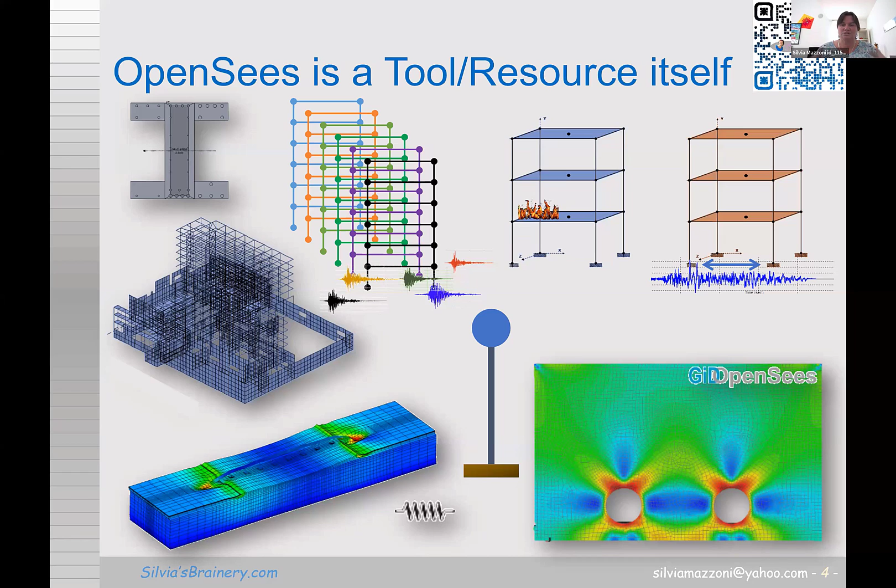And so we got to keep in mind that the hardest thing is coming up with the model. Then putting the language together is secondary. So I think we want to spend a bit more time as well thinking about, once we have this common language of OpenSees, how we want to build different types of models. So I wanted to put that in perspective, that once we get the language down, there's just so much to talk about as well.

I've tried to put these resources into boxes. And so this is just a high level one, and then I'm going to go into the details of them and just give you my perspective on each one of these. The first place you start is, of course, opensees.berkeley.edu. This is the website where you download the program itself. It gives you access to the source code.

It gives you access to even the wiki. There's links to the wiki for OpenSees, and also presentations of events, if there's any OpenSees days, and that's really the core of OpenSees. Of course, that's just a core that's almost small compared to how much more is going on outside of there. But still, there's a lot going on in the wiki, even though right now it's being rewritten into something a little bit more streamlined and easier to update.

But that's a great place to start, look at the wiki and the getting started manual, the command manuals, and also the developer and examples manuals. And so I'll highlight those. As somebody already pointed out, OpenSeesPy has come out. So a lot of students like Python. A lot of other courses are based on Python.

And so it's nice that you can now integrate your pre-processing, because for some reason people didn't love Tcl, and I don't know why. I love Tcl myself, but people were going over to MATLAB as a pre and post processor for OpenSees, and I don't like discontinuities like that. So bringing in OpenSeesPy has now integrated the pre and post processing into OpenSees itself, which I think is better because it minimizes the chances of introducing errors during the analysis and post-processing.

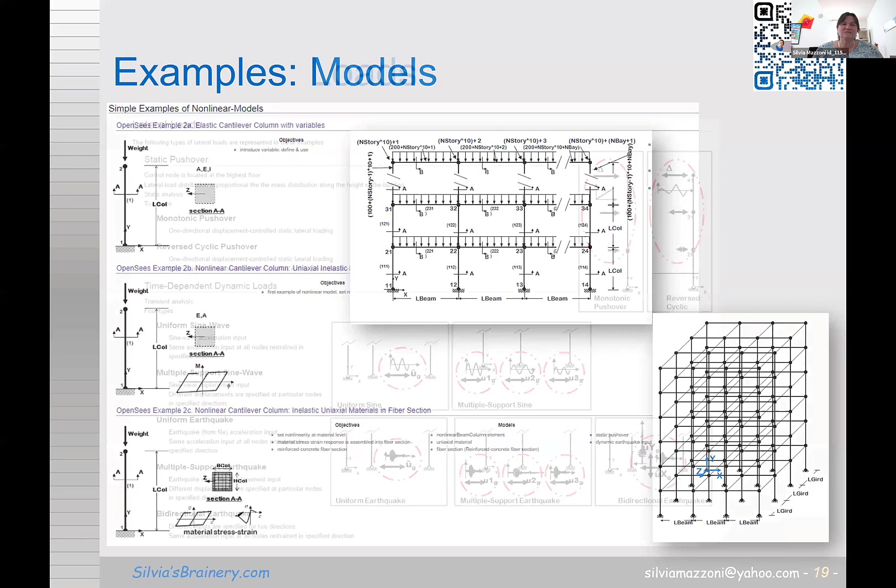So I recommend that you go through this example. It shows you how to do all these different types of loadings as well. And remember, in OpenSees you never start your script from scratch. You always inherit something, especially as students. I can always tell where a script comes from because they're always passed down from one generation of students and postdocs to the next, which is great.

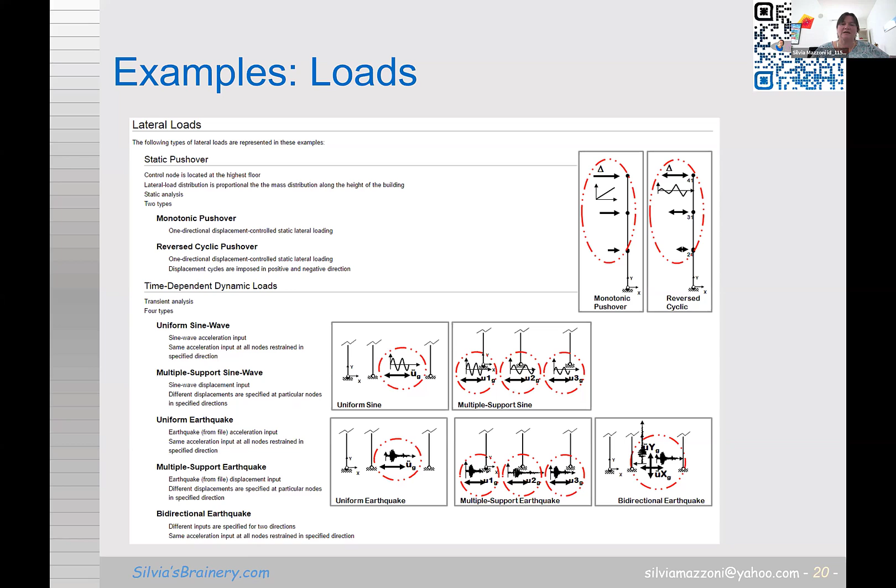And so in the manual here, I give some generalized scripts that you can just carry through in whatever analysis you're doing. And there's simple examples that you can do by hand or just by sourcing the file itself. So it's really straightforward and easy to do with those examples.

What I've done is I've converted all those examples to OpenSeesPy, and you can download them for free from my website. Even though I wrote the original examples in OpenSees Tcl, those you have to get from the wiki website. While they're there, I can't really repost them. That wouldn't be right. But the OpenSeesPy ones are just a conversion, they're not perfect because I wrote a converter that converts the two. But they're a great place to start with all these examples.

And I've made a series of videos on my YouTube channel starting from example 1 all the way to about example 5, and then I got distracted and I stopped. But I think it's really useful to see those videos. I walk through all these different examples on getting started with OpenSees.

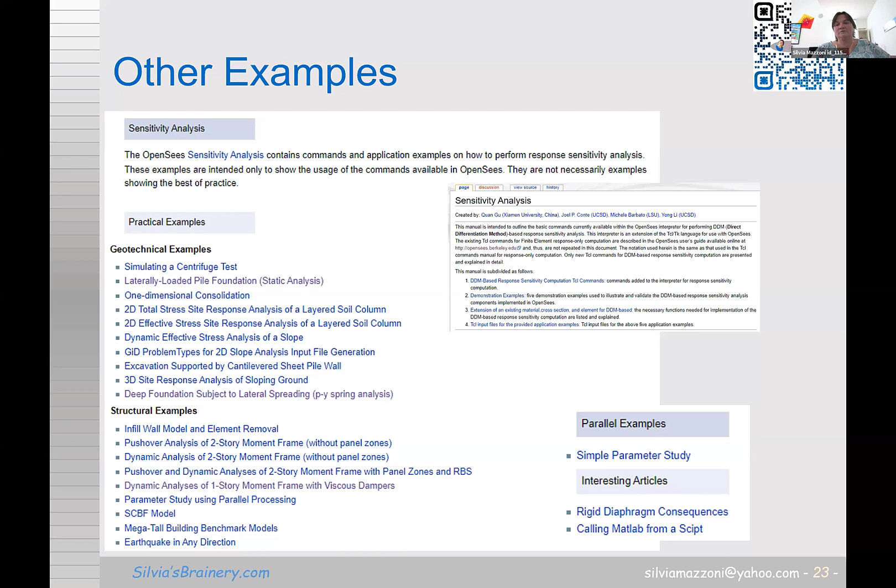There's other examples on the wiki as well. There's even examples with parameter studies, lots of resources there on the wiki that different users have done. Be careful with these because sometimes they may not be consistent with the latest version, but remember the point of these is to learn and gain understanding. It's not just to copy somebody else's script. And that's what's neat about this workshop that you guys have organized. It's a great way to have two-way discussions versus looking at old scripts. So I'm excited about it.

There's a lot of developer resources as well if you go to the wiki. Michael Scott has done some videos on compiling OpenSees in Visual Studio, and he's working on some other videos for developers. As I said already, there's a command manual in the wiki, and there's the Python one. The wiki one has figures, so open up both on your screen. You'll see that the difference is literally just in formatting. They were very careful to keep things in order.

There's also forums everywhere these days. The main one is the OpenSees forum on the OpenSees website. There's 32,000 posts with 10,000 topics. So I would start right there because I bet your question has already been asked and it's already gotten 17 different answers. There's things on OpenSees itself. Even OpenSeesPy, which is relatively new, is quite popular already.

As you can see, you have responses from the developers as well as other users, so it's really a great community there. This is managed by Dr. Günay, who's going to give you the presentation, and he has a lot of insight from a lot of different users and perspectives on OpenSees.

The Facebook group I've already mentioned, it's kind of cool, it's a place I visit every day. I try to answer when I can, but sometimes the questions get complicated and require more than a simple answer, and I wish I had more resources to do this. I'm not getting paid to work on OpenSees, so I'm just trying to do what I think is appropriate in my limited time.

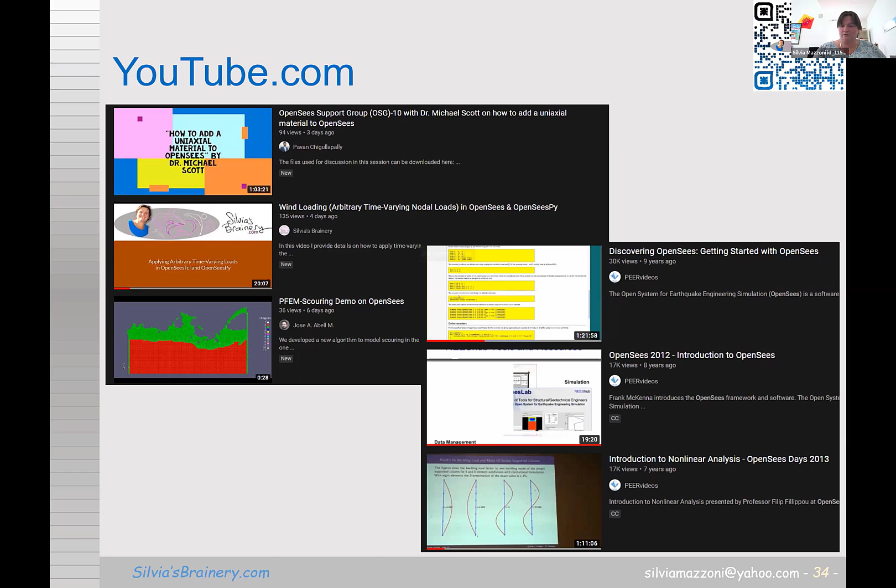So all these different topics and applications of OpenSees, you're not just learning about OpenSees, you're learning about numerical simulation, which is really the goal here. We're not getting your PhD on learning OpenSees, you're getting your PhD on using OpenSees. So it's great to have this workshop because it accelerates the learning curve, and there's a lot of resources on how to take that one step beyond.

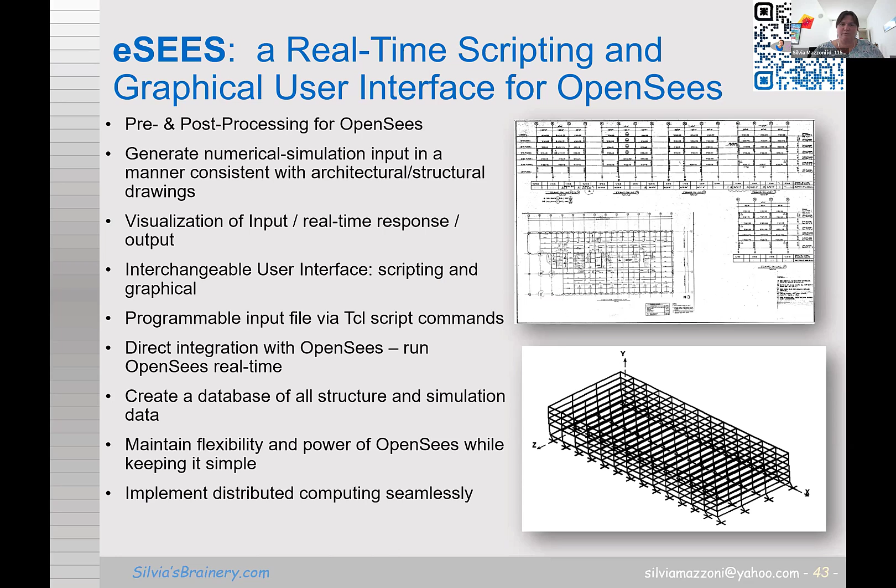So here's a little summary of what eSEES is. What I wanted to do is develop a user interface that's not just graphical, because I think there's a lot of power to being able to program your user input.

And then, excuse me, I'm going to sneeze. No, I didn't sneeze, okay, whew. Now you know it was live.

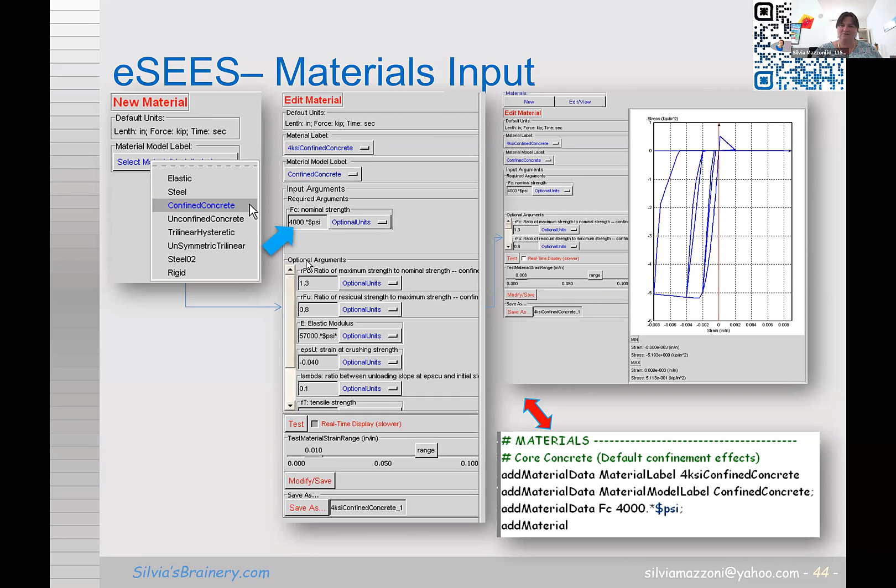What I also have is everything can also be done in a script. So the graphical user interface is great to get things started, to run some testing of your materials and your models, but then when you need to run a lot of analyses and write a lot of variability into your input, you can always go back to the Tcl interface. I'm working on converting this also to Python, of course. It's really live and interactive in building your model.

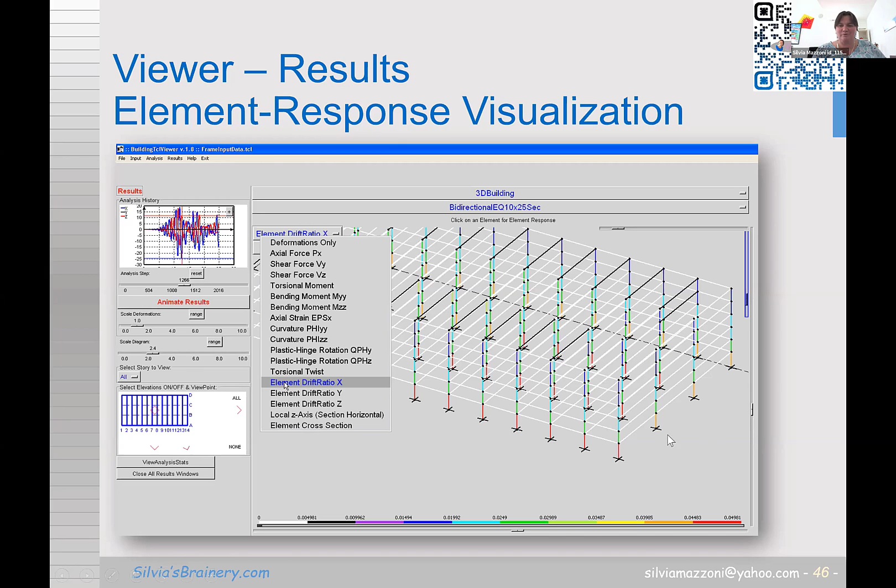Of course the trick is the visualization of the response. It drives me crazy to draw the full element in certain colors, because this should only really be done at the integration points where I know what the actual values are, but that's just my own little pet peeve. I've implemented fiber section analysis from your structure itself, so it's kind of neat.

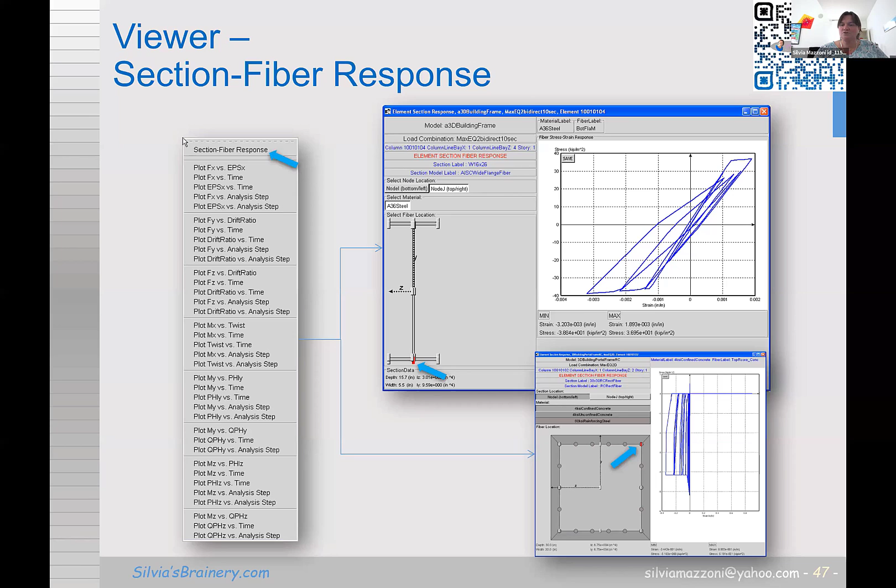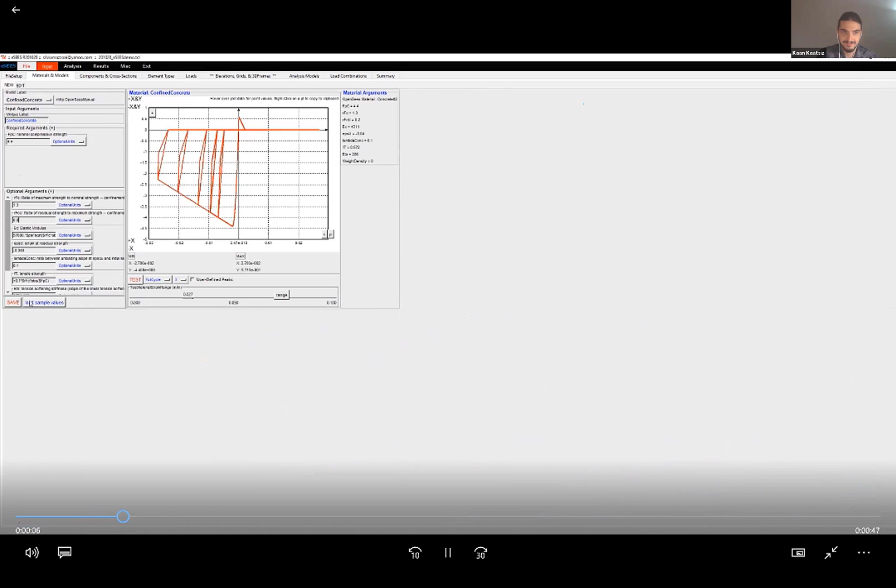I'm going to switch over to this little video. Let's try that - now we got sound as well. Good, oh excellent. So it's great for testing materials, which is what I'm showing here.